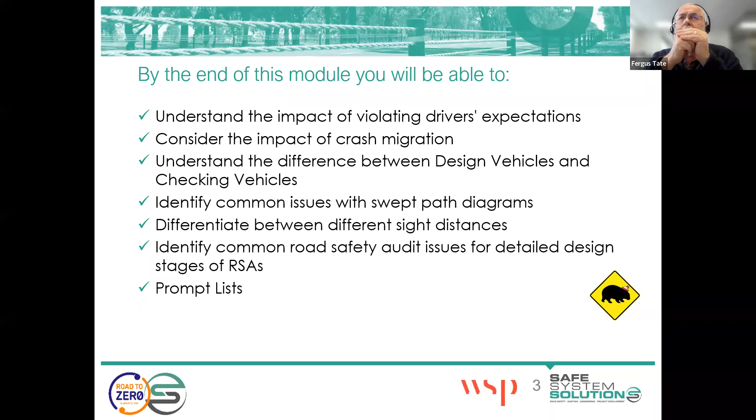Okay, thanks Kenn. As Kenn said, at the end of this module I've tried to collect things that I think are important as we go through, things like what happens if you violate drivers' expectations, how crash migration can occur, and those are particularly pertinent to rural road issues. Then looking at things like design vehicles and check vehicles, which apply to both urban and rural, and looking at some of the things that occur around sight distances in the urban area. Finally, I want to finish off looking at the information for safety audit at the detailed design stage and the role of the prompt lists. I think the really important thing with any safety audit is actually understanding the scope of the project you're involved in, and making sure you and the audit team members have actually got the skills to cover that scope as you go through.

So it's quite important, so I want to kick off first of all looking here. The Guide to Road Safety Part 6 talks about safety audits and identifies four stages of safety audit, I suppose: the feasibility, the preliminary, the detailed design, and the pre-opening.

And I've got a little poll here, which if I can find it and bring it up... I'll bring it up on screen and you'll be able to see it right away there, Ferg. Thanks, Kenn. So what do you think is the easiest stage to audit? You've got a single choice, and if you pop that in your Menti, that would be really good.

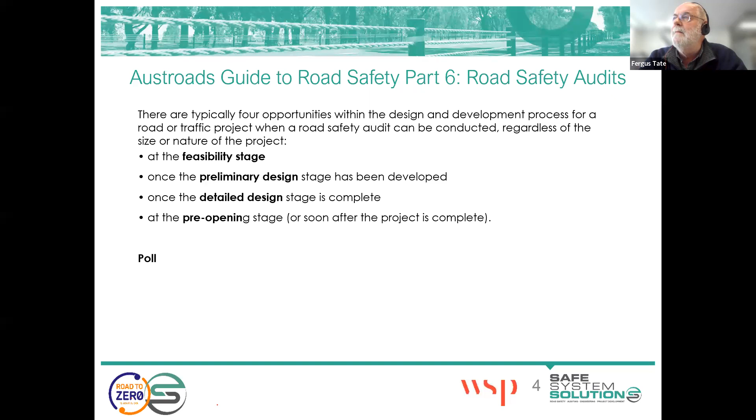Okay, so we're seeing some people popping their thoughts in. We'll give it a second here, and lots of answers are coming in.

Give it 5 more seconds. 4, 3, 2, 1. Remember, you're not marked on these.

I'm going to stop, and we'll share results with everybody. So looks like for most people are saying pre-opening, closely followed by preliminary design, and only a few people are saying detailed or feasibility stage.

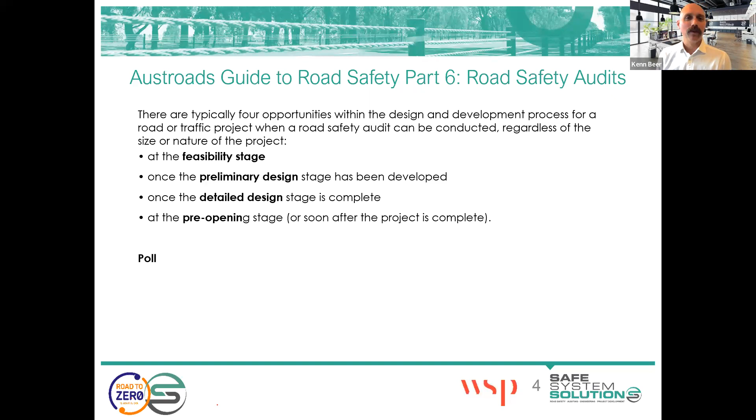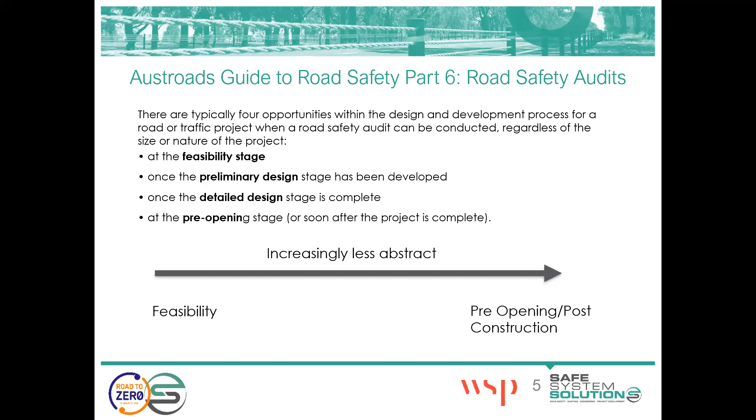Over to you for your thoughts. Yeah, well, I agree. I think when you're looking at the pre-opening or the post-construction, it's very concrete. You're looking more or less sometimes at a snags list and things. It's far more difficult to do the feasibility stage and the optioneering, and that's actually an area where using things like the Safe System Assessment Framework and option selection plays a much bigger part when you're back in those early stages. I actually disagree slightly with the poll, because I think it gets increasingly easier as you move towards post-construction.

So I think the detailed design is actually easier than the preliminary design, because with detailed design you've got something that's far more concrete in front of you that you can work your way through systematically.

One of the things that I find when I'm doing the audits, particularly in design and post-construction, is getting the evidence for the audits. And I like to be able to tell the story of why something is. Just because I don't like the way somebody's done a design doesn't necessarily mean it's bad. You have to be able to tell the story.

You have to say, I don't like this because it's going to have this impact, which will result in more deaths and serious injury. And if that story becomes more and more convoluted in order to get to death and serious injury, you know, like it has to be a Wednesday at 3 o'clock on a snowing afternoon, and if this happened and that happened and something else happened, then you might end up with death and serious injury.

If the story becomes long and convoluted to get to that point, you've really got to ask yourself, was it real? I think particularly as you move across, when you're in those earlier feasibility stages, you've got a lot of imagining to do, and you've really got to ask yourself if it's real.

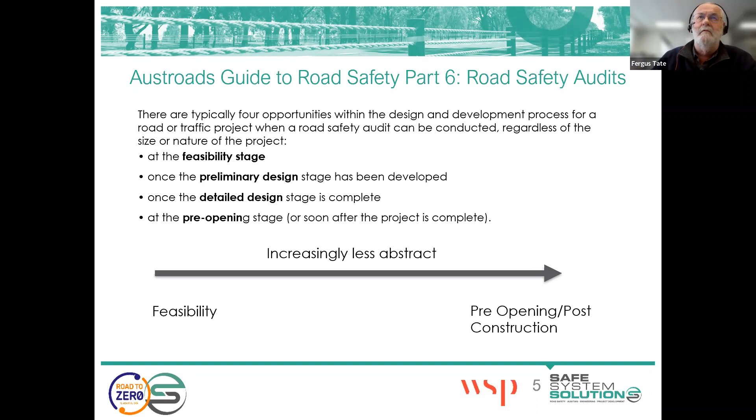I want to start off now talking about drivers, and I don't like necessarily reading off slides, but these are 3 quotes from a US Highway Agency document from 1997. Drivers generally make fewer errors at geometric features that conform with their expectations than at features that violate their a priori or ad hoc expectancies.

In other words, drivers make fewer errors when things conform to their expectations than when they don't. If they're thinking something's going to happen, and that happens, that's fine. If they think something's going to happen and it doesn't, there's more chance of it ending in an error. If a road design is consistent, then the road should not violate the expectations of motorists or inhibit the ability of motorists to control their vehicles safely.

Again, consistent design feeds into that idea of making fewer errors. Consistent roadway design should ensure that drivers are able to operate safely at their desired speed along an entire alignment. So the key thing here is, does the design you're looking at feel consistent and send the right messages?

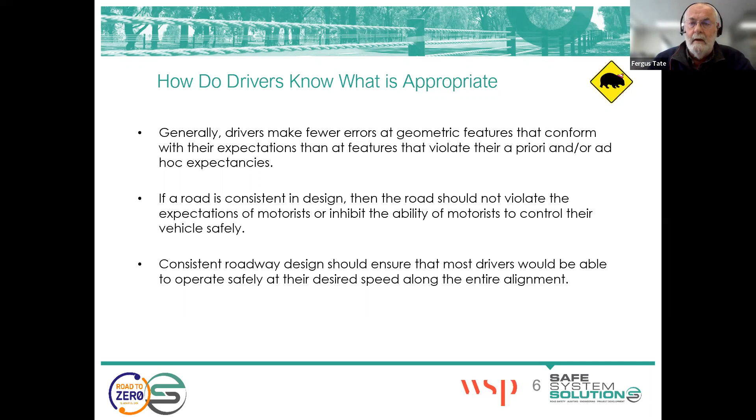There are a number of features that don't follow these principles, and in particular, one of them is curves. I don't know what it's like in Australia, but in New Zealand, the bulk of our crashes occur on curves on rural roads. Intersections and curves are the two biggies. There are two types of curve that violate drivers' expectations and increase the likelihood of making mistakes: those that are difficult to read and those that are out of context.

Now, the curve negotiation equation says that E, which is the super elevation, plus F, which is the friction, resist the forces from speed and radius.

And I've got a little poll. Kenn, can you bring up the poll, please? Launching the next one. Okay, so of these four factors, which has the most influence on curve negotiation?

Remind us what E is. So E is the super elevation or camber of the curve. F is the friction of the pavement and the tire. V is the negotiating speed, and R is the radius of the curve.

People are pondering that and popping in their thoughts and ideas. We'll give it another 5 seconds on this one.

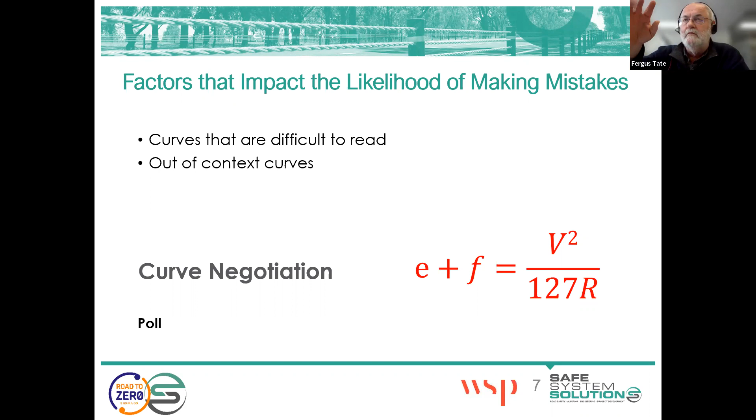Yes, when we're looking at a curve, drivers can't see F. They have no idea what F is. They can feel E once they're in the curve, but their curve negotiation speed V, which is critical to them coming off the road, is more set by R, the radius. So V and R are the two greatest components that you have.

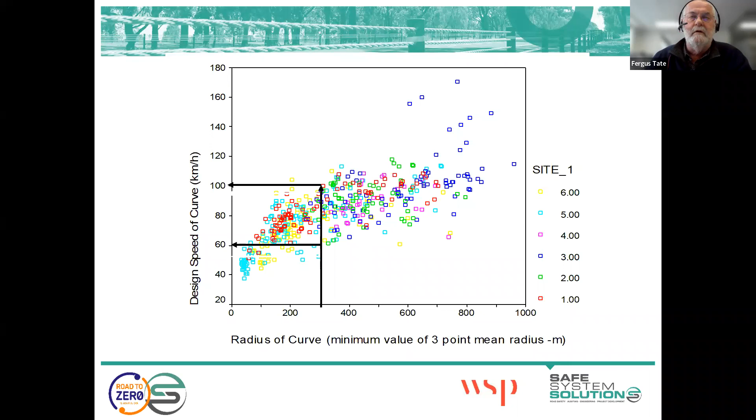Now there's a group of curves that typically sit between 250 meters, sometimes 200 meters depending on who you're talking to, and 500 or 450 meters, where effectively drivers are not changing their speed from the approach for those curves. But as I showed you, that 300 meter curve could have a 60 kilometer an hour design speed, and yet they don't change their speed of approach.

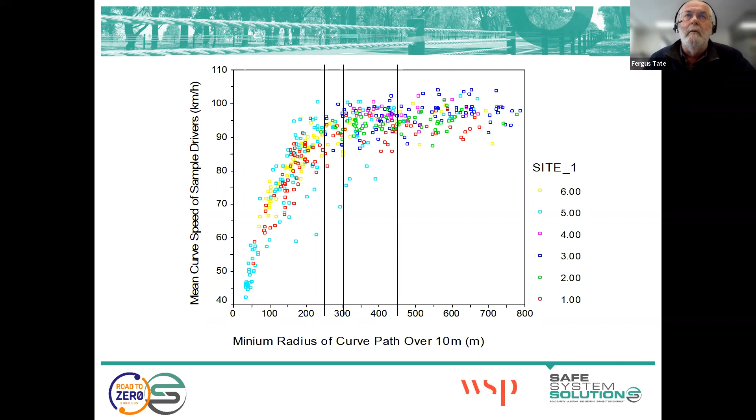In fact, the New South Wales guide actually talks specifically about these curves as being hard to read. It's difficult for drivers to assess what the design speed is and to behave appropriately, because the curve could violate their expectation, particularly if they've driven through a lot of 300 meter radius curves with a higher design speed, and then get another one that looks the same but has a lower design speed. So it's quite important that we try to avoid those sorts of curves.

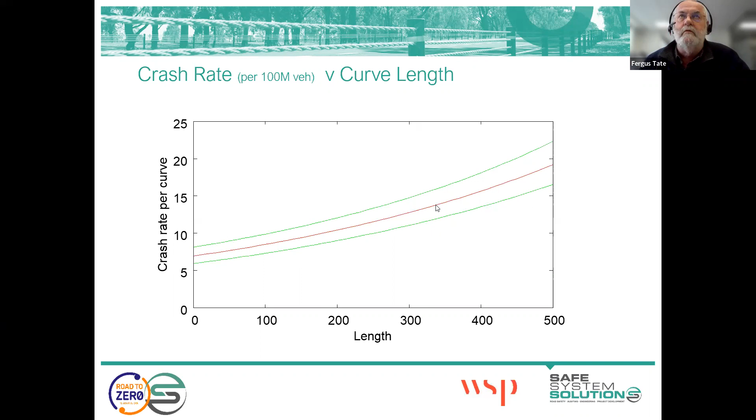The other thing we find is that the crash rate per 100 million vehicles entering the curve increases quite substantially with the length of the curve. So if you've got one of those curves and it's a long curve and you go into it too fast, the chances of you getting out the other end in one piece are greatly reduced. When you've got short curves, you can more flat-line them and it's not so bad. But if it's a long curve and you make an error of judgment entering it, the chances of coming out the other end safely are quite reduced, which is why this graph rises so dramatically.

The other thing with curves is coordination. Here's a bunch of poorly coordinated curves. So this one here, we've got a hump, and then just beyond the hump, we've got a horizontal curve.

So it makes it very difficult to see things, so you don't know what's going on. In this case here, we've got a rail crossing just beyond the profile that makes it difficult to see. You know, how you actually coordinate curves is really important. You really want to avoid two similar horizontal curves in the same direction, as this gives you a broken back effect, and you need to separate such curves out by probably around 2 seconds of travel time. And you need to be wary when you're doing designs about optimizing the vertical profile.

My friend Keith Wheel some time ago showed me a design he was auditing, which I thought was fascinating. In a distance of about 800 meters, the designer had put in 6 different vertical elements, 6 different vertical curves, and while that might have balanced the cut and fill, it makes it a really difficult alignment to read. In some ways, it's a little bit like polishing a turd. You're not actually winning a great deal out the other side, because those incremental bits compared to a single curve are really quite small, and certainly smaller than the bulking factor of your earthworks.

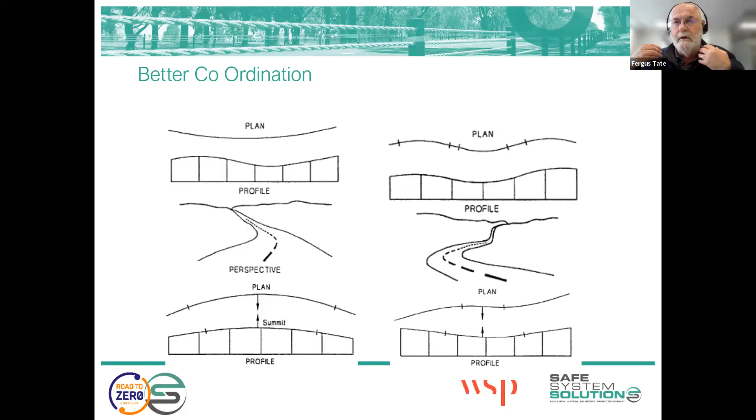You're better to coordinate curves in this way so that you get a flowing alignment that people can see their way through and go. So the big thing so far is watch out for curves in that 200 meter radius, that 200 to 500 meter radius band. And then if you're in that curve space, make sure people can actually get the forward view to see what the forward alignment looks like.

One of the things that comes up time and time again when we look at this business of approach speed and curve speed is crash migration. Too often we work on projects, whether they're realignments, passing lanes, any sort of shape correction and link width increases that increase the operating speed. They typically keep being built until they become too expensive to build any further. So what usually makes them too expensive is something like a bluff or a deep fill. And often what you find is that the scheme finishes just before a really dodgy curve or a really dodgy narrow section.

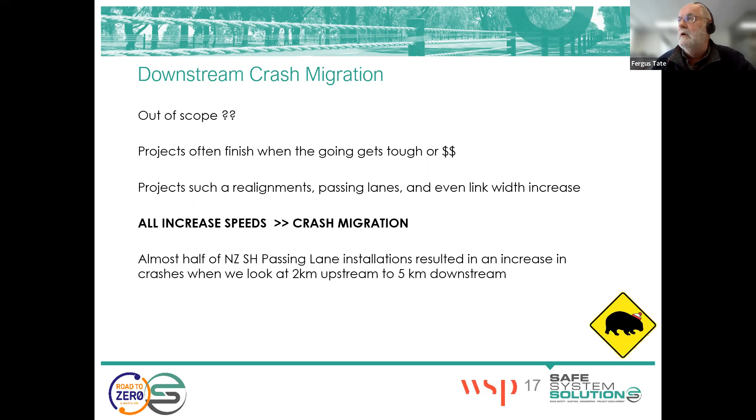Fergus, you've got a couple of questions that have come on screen.

A couple of questions have come in. I'll come back to crash migration, but the first one was just around how the speeds were calculated for the curve speeds you were talking about. Were they actual vehicle speeds measured, or were those sort of ball bank tests or the like?

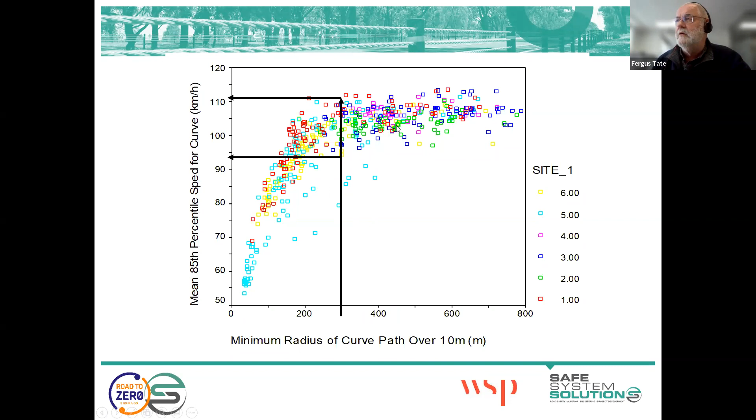In these graphs here, the minimum curve radius was calculated using the curve equation, so that's the minimum negotiation curve speed. The approach speed in this case was actually measured in a sample of drivers driving those curves in an instrumented vehicle. The other one we have done is looked at the relationship between the approach geometry, which is the geometry typically over the preceding 500 meters.

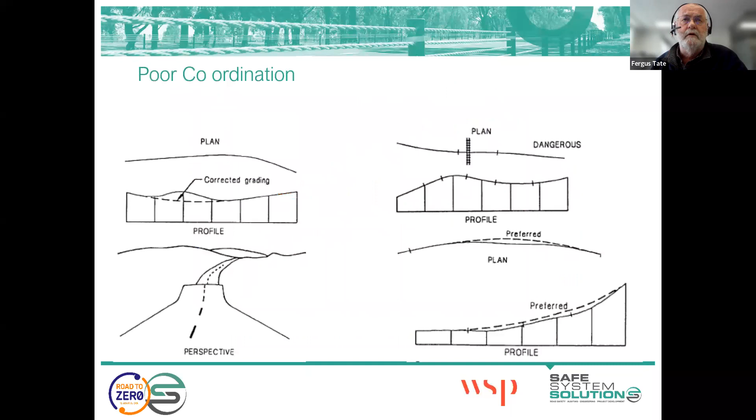That was actually used in the out-of-context curves analysis, where we calculated the approach speed based on the horizontal geometry of the preceding 500 meters, and the curve crash rate based on the geometry of the tightest 10 meters of the curve. Right, okay, good, thank you.

Next question is around, where do you stop? So this is back to what you were talking about for the crash migration. Is it anything that influences, or anything you see on the way out to the audit site? How do you draw that line of what would be included in your audit and what wouldn't?

What I would be looking at, particularly if it was a realignment, is the first couple of curves downstream of the project. What you're really looking for is the situation where speeds are likely to have increased. Coming off the end of the project, if it's been a realignment or something like that, you will get an increase in speed.

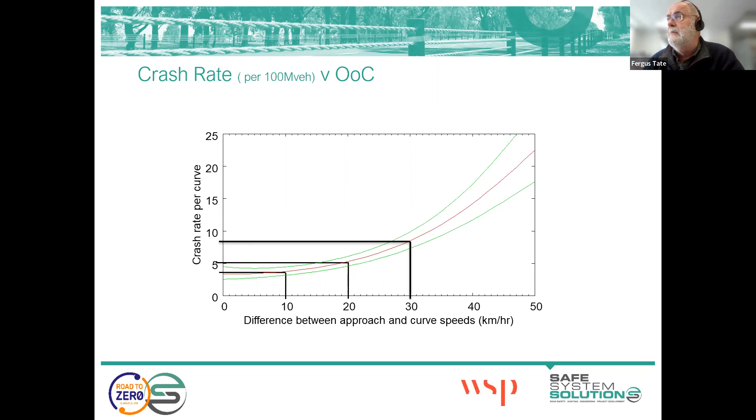If you're joining another new alignment, that increase of speed will be trivial because it already has a high speed on the new alignment. If it's going back to an old alignment, then you'll get that speed differential, and you'd certainly look at the first curve and possibly the second. After that, basically, if they've got through those two, they're probably back to normal. Does that make sense? Yeah.

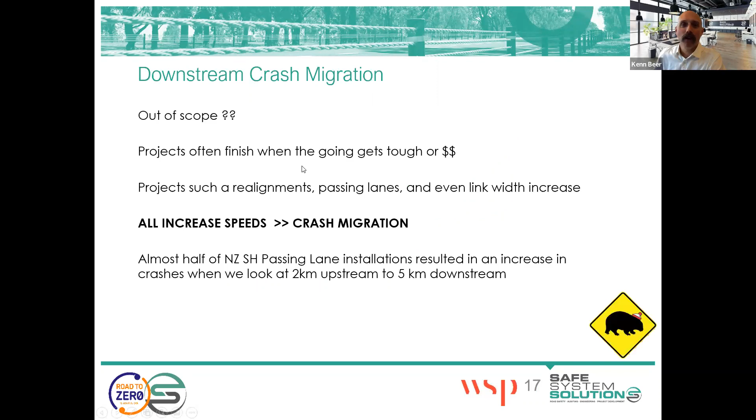I'm just going to talk more generally about safety audits as a whole, particularly at the design stage. There's a lot of stuff - a lot of people talk about the crash history and that you should have the crash history. You've got to remember that a safety audit is not a crash reduction study, and neither is it a comparison with standards.

You're asking yourself, what is it about this site that can be improved to improve safety? So it could be compliant in terms of standards, it may have no crash history, but you're asking yourself what things can be improved.

But there's a lot of data that you can have, like the crash history at the site, which may indicate the types of problems that need to be solved, and previous audit reports, and the volumes of pedestrians and cyclists and the types of people using it. But they're all about trying to understand what's happening at the site, and what the safety problems might be.

Not, you know, the standards say this should be this radius curve, and in fact you're 2 meters shorter. I was doing some work in the UK a few years ago now, and one of the things that really frustrated me there was...

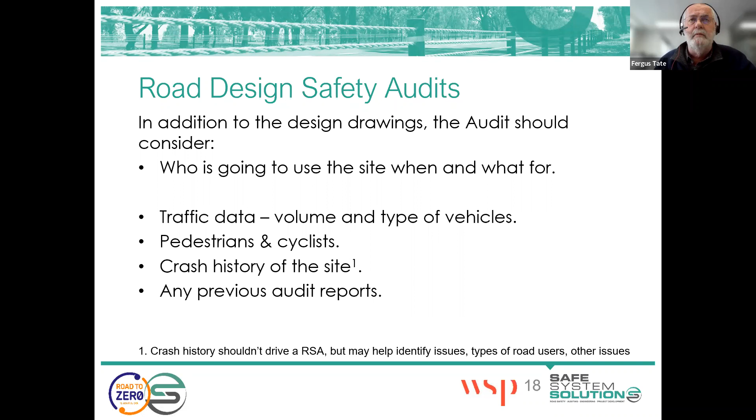So in addition to the drawings, you need to compile all of that range of data to help you understand the site and what sort of problems you may have there that need to be addressed. Now, who can tell me the difference between a design vehicle and a check vehicle?

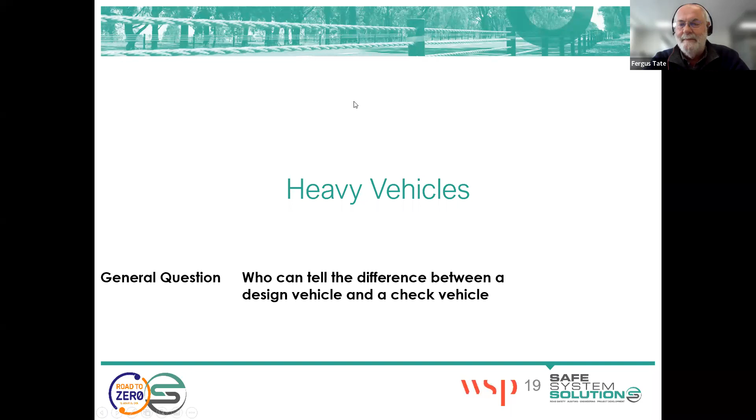I've got some answers for your design vehicle checking vehicle question here. We've got a few different answers, and you can pick one that you like, Ferg, and we'll give a prize. So we've got one that says design vehicle is the one using the site, check vehicle is a check versus RTS 18. One just talks about clearance envelopes. And the third one to choose from: design vehicle is what uses the site every day, check vehicle is maximum size vehicle that may enter the site.

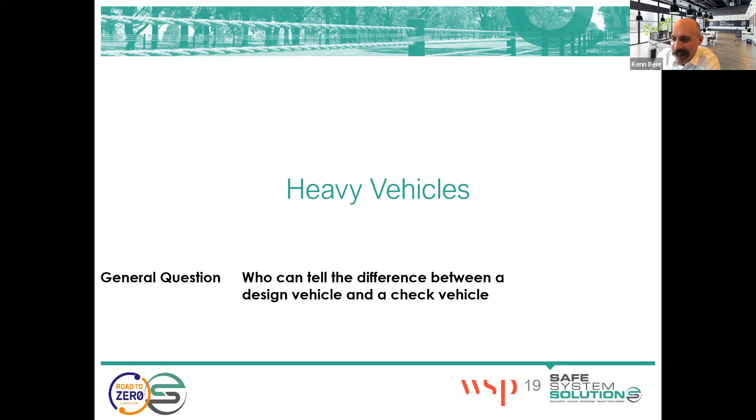Typically the way I look at it is that under the road rules, the vehicle should stay in their lane. So the design vehicle is the most practical vehicle that should not encroach in the adjacent lane or shoulder. However, the check vehicle is there to assess what would happen if an occasional predictable large vehicle were to use the site - so it doesn't have to stay in its lane. It might be something that goes through it off peak, or another time of the day.

In New Zealand, we typically use for the state highways a quad axle semi as the default design vehicle, and then we might check with a 20 meter B-train or 25 meter B-train, depending on what was using that site by exception. So that's typically what we're doing. What we're thinking is that you're unlikely to have those extra large vehicles often - in many cases they actually turn within the same parameters as the quad, but you're looking at them being used on occasion when other people can get out of the way.

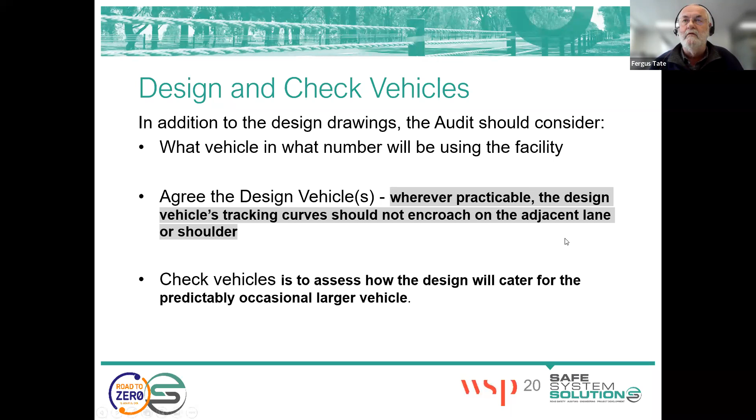Issues with design vehicles, particularly when designing urban intersections, include using the wrong design vehicle, and making sure that the swept paths are actually accommodated. One of the key things with the swept path is the right speed assumption.

If you ever get turning circles on a drawing, find out what speed they were done at. I was just looking at a project where a vehicle was going to pull in and do a turn, and I found that the swept path that lets it make the turn without moving out of the lane assumes 5 kilometers per hour. So the vehicle was going to turn across 2 lanes of traffic, which in itself is a disastrous design. It's going to filter turn across 2 lanes of traffic and clear those, doing it at walking speed, because that's 5 kilometers per hour.

Interestingly, when we bump that up to 20 and 30 kilometers an hour, guess what? It couldn't stay in its lane. That becomes particularly important where you've got reverse lock turns, and the turning circles have been done at low speed. It's really hard to go from lock to lock at higher speeds without drifting.

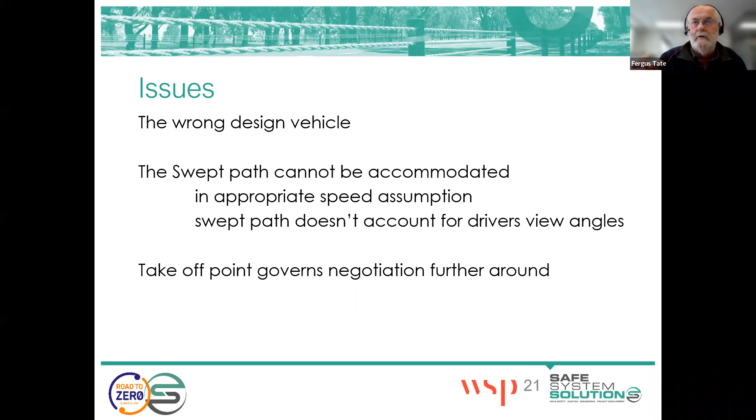The other thing that becomes really important is what I call the takeoff point, particularly where the takeoff point governs the curve negotiation further round the curve. Maybe on the exit of the curve, you've got to set yourself up perfectly at the start so you can get out at the exit, and yet you haven't seen the exit. So we need to have a look at that.

The sorts of things we've got to watch out for are encroachment into the adjacent lanes, encroachment into pedestrian areas - and that's really interesting with buses. Frank Lai at Leeds University did a UK study on pedestrian impacts with buses. The biggest impact was wing mirrors on buses hitting pedestrians standing at the side of the road waiting to cross. Also conflicts within the intersection and impacts with roadside furniture.

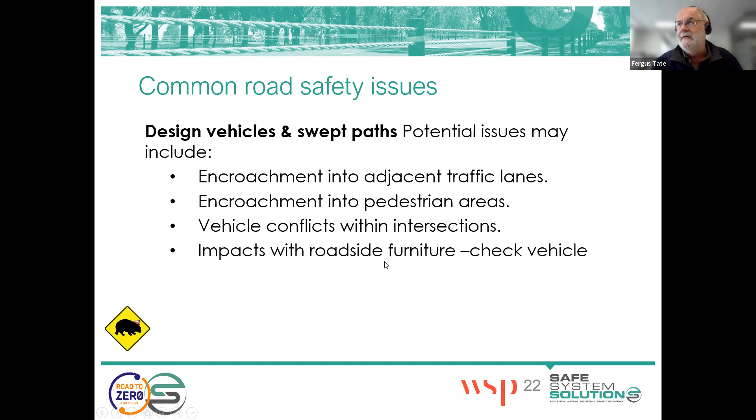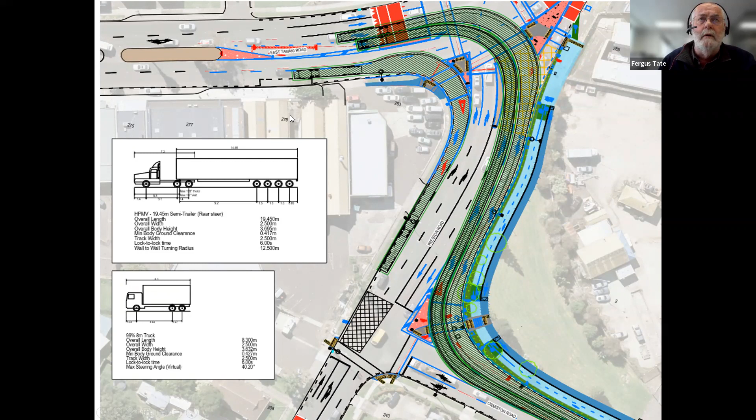In the Austroads guide, you're talking about 2 meters clearance between these vehicles and 1 meter between vehicles in the same direction. So if I roll back up here, nothing like that's happening in this case. Although I'm not design guide driven, it's certainly something to have a look at in terms of what's going on and what the potential conflicts are, and whether they could end up in sideswipe crashes as a result.

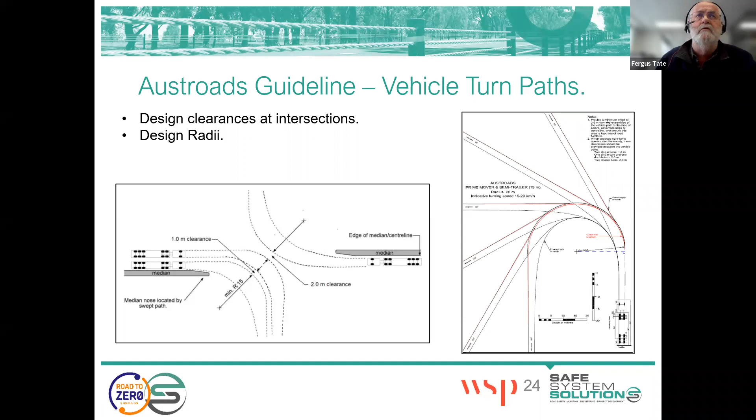This one here is an interesting one. Every time I see a swept path that does something like this, it rings alarm bells, because it's very hard - I used to drive a bus, so I've just recently sacrificed my license because I've got diabetes now. In order for this vehicle to end up over there, it's got to do a very complicated series of maneuvers, which are going to make it very, very difficult. Because if I was driving that, I'd drive it as a single curve, and I would end up encroaching here.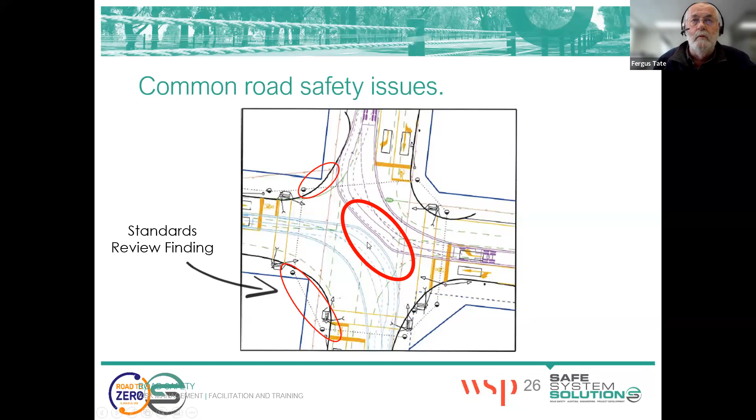So somebody has worked out a convoluted tracking path through here in order to get that clearance between the two opposing turns, and that's really a made-up solution, if you like. It's not one that drivers would follow.

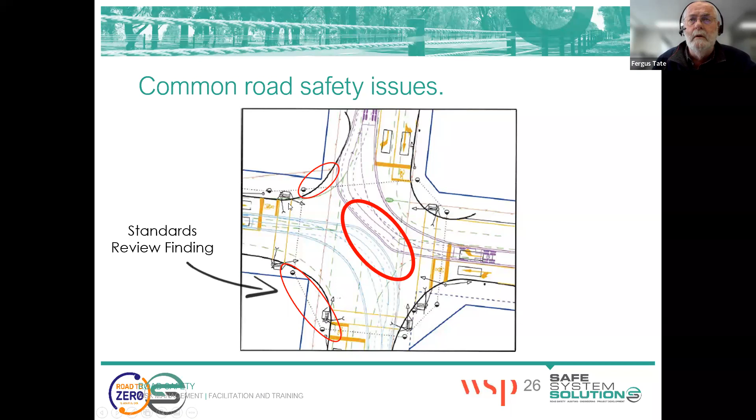Also, looking at the swept path around here, we've got issues where we have pedestrians waiting at the signals, and they're vulnerable to things like coaches and mirrors as we go through. Over this side, the curbing is probably going to cop it as well.

So here's another one. This is the bus depot, isn't it? Yes, that's exactly right. It's a new bus depot being designed, with the car park bit there, and it's where all the buses are going to be going in and out. As you can see there, there's some swept path challenges mounting over the areas.

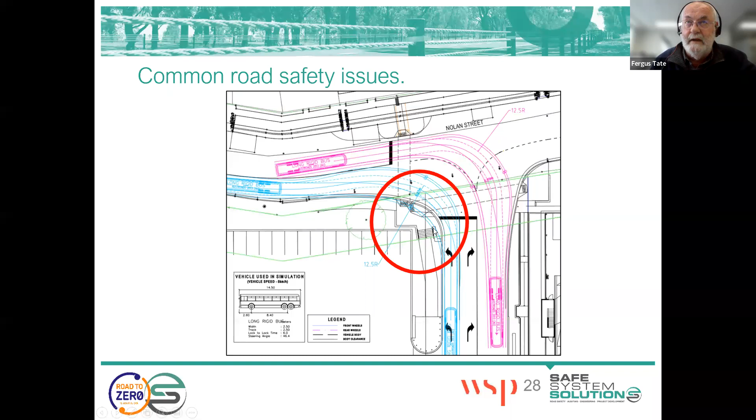It's bloody near on the wall to the steps. Yep, that's right. That kind of stuff is a good highlight of probably incorrect vehicle choice, where they may have said, well, a checking vehicle potentially is a bus. Well, that obviously is not going to be right to call a bus a checking vehicle in a bus depot. It would be a design vehicle.

So imagine that you're a visually impaired person standing here waiting on these tactiles, because that's where you're waiting to do. Then somebody comes and whacks you on the head with their wing mirror as they make this ridiculous turn. This is the type of thing in urban areas that we've got to watch out for.

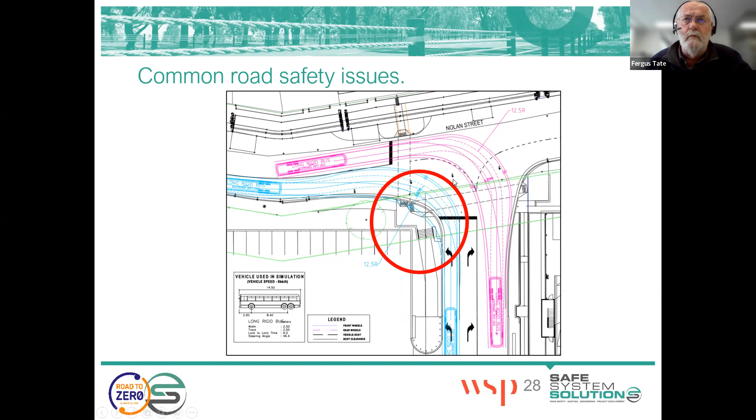Here's another one with parallel movements through here. These movements can run at the same time, and sure enough, you've basically got an overlap through this area here.

Unlike the first example where I showed you a single unit and a truck and trailer unit, where it's more than likely that if they were traveling in the same direction they would stagger themselves and sort themselves out, these guys are coming from opposing directions. They've not got that option. So you've got a highly increased risk of sideswipe crashes.

Again, with all the things in safety audit, the question is what is the crash outcome that's likely to happen? These have got insufficient separation of the turning paths, and that's likely to lead to an increase in sideswipe crashes. Always reason it back to crash type.

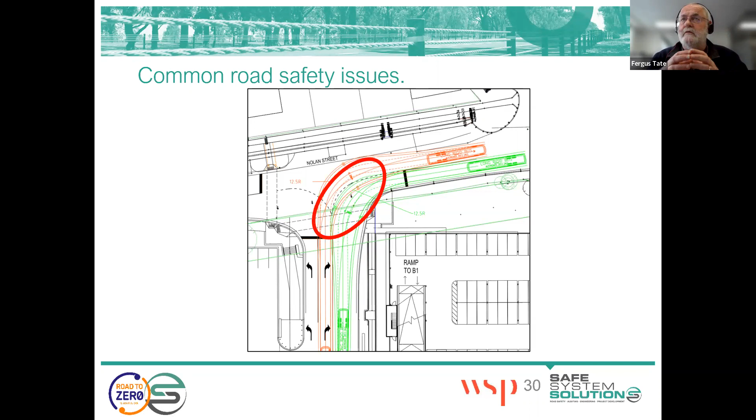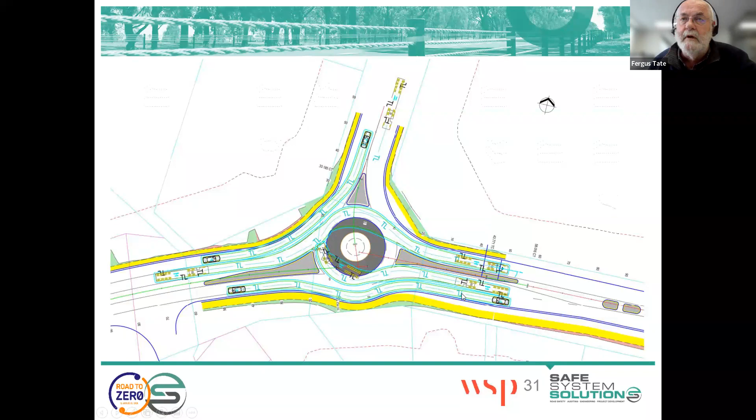This is another interesting one where the swept path of the bus—this is a turnaround facility on State Highway 2. This is a swept path for a truck, comes in here, round, and waits at the give way. Now, the vehicle that's likely to hit him as he pulls out is over here.

If you're sitting in the cab of a vehicle, you've almost certainly got to strain to see, or you may not even be able to see that vehicle because the stand-up point isn't compatible. It would be really nice to square that up so they could look out their side mirror and see what was coming, but the minute you do that, you can't actually turn this side of the wire rope barrier. So there are some issues floating around in here.

So this guy, thinking about the safety issue, when parked here, cannot adequately see the approaching traffic, and may choose a wrong gap, which would end up in a crash. So that's what's going on there.

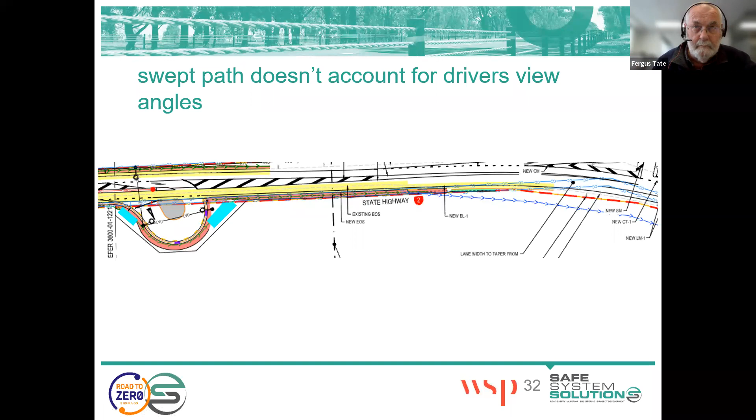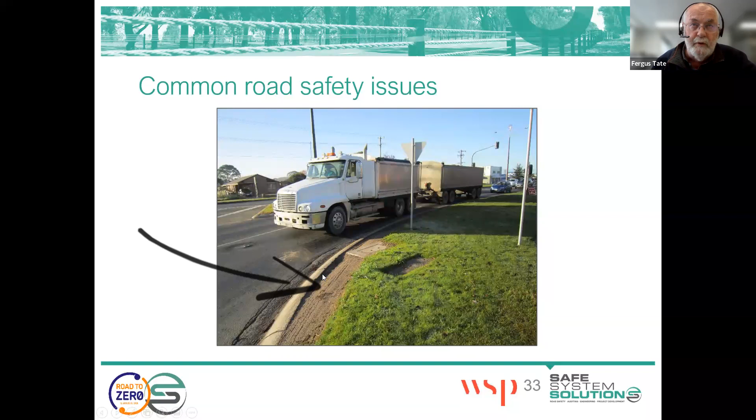There's lots of signs that you can see on site that tell you a design isn't working. You can see the start of these when you've got things like post-construction audits and broken curb and dirt everywhere. This one here, the tracking is quite clear that in order to make the turn that's required, these guys have had to come right over onto the island.

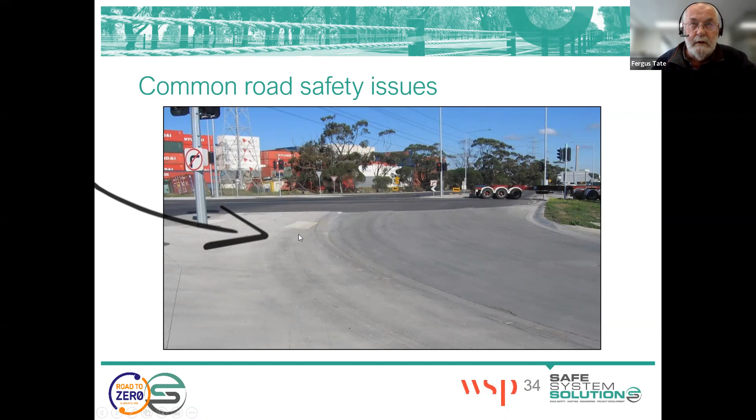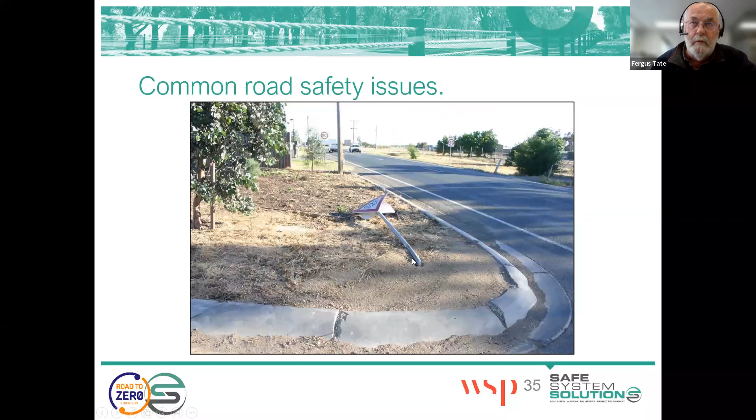So these are all signs in the classic infrastructure. And the signs getting bowled and things, not only that, somebody's now got to come back and put themselves at risk to set that sign up, and it'll probably get knocked down again.

The other one that I want to talk briefly about, which is quite important particularly in urban areas, is sight lines. It's another area where it comes up regularly in safety audits - we don't have adequate sight lines to other road users, to other vehicles, and in particular in rural areas to the pavement, because the pavement is where the markings are, which tell you what it is that you need to do, whether they're lane markings or hold lines or anything like that.

When you're dealing with intersections in particular, you want the sight lines to a zero object height so that you can see the pavement markings and know where you're supposed to stop, so you don't overshoot and put yourself at risk of collision with through vehicles.

There's a number of things that will restrict sight lines, and particularly when you're out on site, you need to be aware of some of the more dynamic things, such as shadowing vehicles, but also parked vehicles.

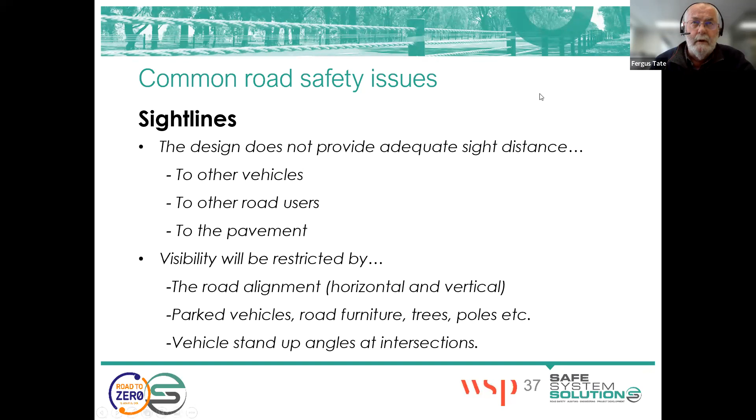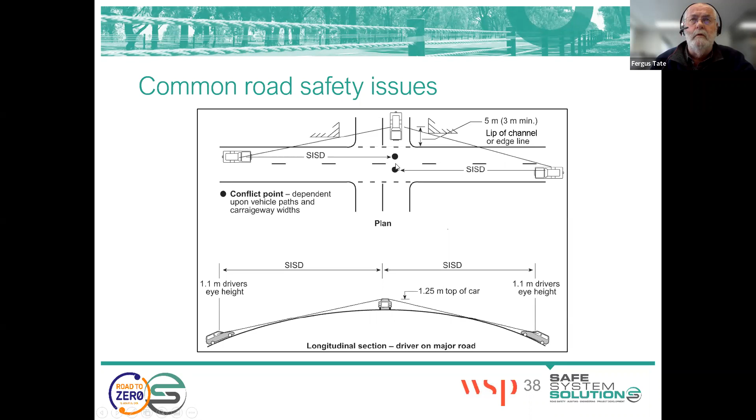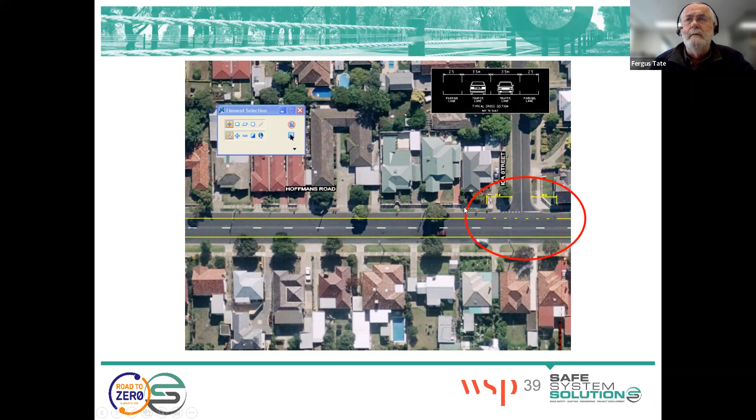But if you imagine a road like this - I'm just looking at this one here, we've got an intersection here. We can go back 5 meters and see how far, but we've got trees and obstructions through here. When we actually have a look at this now, if you look just behind that Toyota before the Pajero, I think you can just see the roof of...

You could just see the white bit of this bit here, I think - is that it just there? That's giving you no time to clear the intersection. So you've got a sight distance problem there.

The other one that you get, of course, is where you've got multi-lanes of traffic and you've got one vehicle shadowing the other, and you have problems. That often occurs with left turn slip lanes and through vehicles - you think the vehicle's turning left and you pull out, and the vehicle that's following just beside it cleans you up.

There are heaps and heaps of different sight distances, and you need to work your way through all of them, but also have a think about what it is - MGSD is quite a big requirement. It's the minimum sight distance based on the gap necessary. So what you can do in some situations is make sure that you provide as a minimum safe stopping sight distance.

Interestingly, providing safe stopping sight distance above all else is effectively changing the priority at that intersection. Because what you're saying is, instead of the side road having to give way, if the vehicle moves into the traffic, then the through traffic must stop.

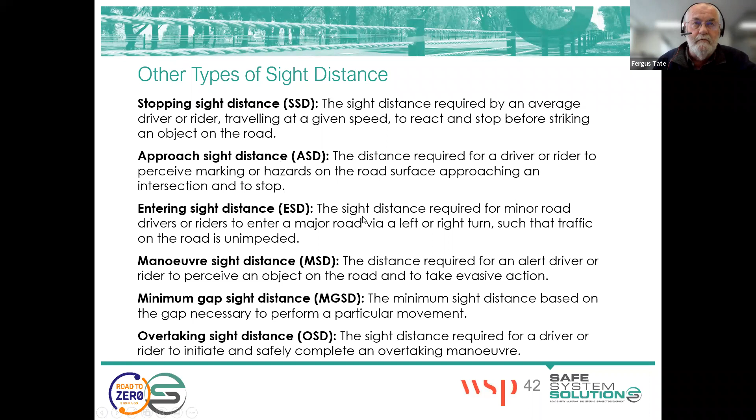Some of the common issues - how are we going for time, Ken? Doing well, Ferg, you've got plenty of time. Probably about 10 minutes - we're going to give them a stretch break, unless you're... Well, I'm actually going to be nearly finished, because I seem to have gone through it much faster this time. I don't quite know why. No, it's not a problem - they will. I've got a nice juicy assignment for them to sink their teeth into, so they'll use any spare time at the end to start that process. Okay then, so we'll let you finish off, and then we'll have a little stretch break after you're done.

Okay, yeah, I'm sorry. I seem to have gone quite a lot faster this time, by almost twice the speed.

Okay, common issues at intersections. See-through is where you're not looking at the current intersection—you can look straight through it and not realize the intersection exists, because you've got a line of sight through. That's quite common on grid networks particularly, and applies equally to rural and urban areas. The stand-up angle is the angle at which a vehicle is stopped and where it's looking, and can it actually see?

Sight lines to signals and roadside hazards. An interesting one is back of queue issues—this is a classic often to do with motorway ramps, which typically end in some form of traffic control. By the time you get a queue, and then the deceleration needed to join it, vehicles on the main line of the motorway have to decelerate to join that queue, and they may not feel comfortable doing so. It certainly won't be good for them to drop to 40 kilometers an hour on the main line to join the back of the queue. So you need to understand where the back of the queue is likely to be under different conditions, and add on the length needed to decelerate to be clear of traffic.

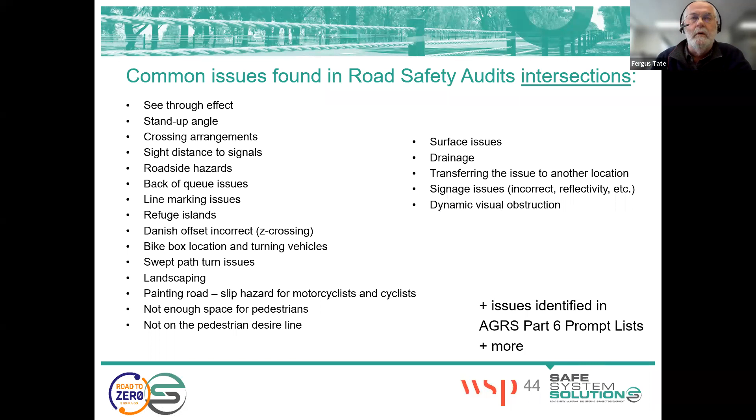Then there's dynamic visual obstruction—other vehicles typically blocking your sight distance. The Austroads Part 6 has prompt lists with considerably more detail, and I'll talk about prompt lists in a minute since that's the last thing in my presentation. I was just going to mention some of the mid-block issues, which I think are all reasonably self-explanatory. Skid resistance issues, of course, are very difficult to see.

Pavement defects are very easy to see, but typically they are not as big a safety issue as some people would like to think, though for certain users they are. One that I find particularly annoying is the flow of detritus from driveways and things onto the highway, particularly in rural areas where you've got farm fences.

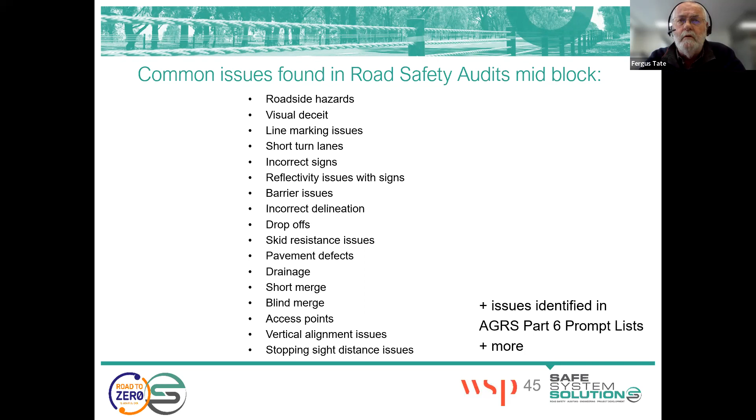We've done some work in New Zealand where we found that if you seal back 11 meters, you generally reduce the amount of detritus that ends up on the pavement, which is really important for motorcyclists, because there's nothing worse than coming halfway through a bend and finding there's a pile of detritus across the road.

Finally, in the prompt lists or checklists as they used to be called, the Austroads Guide has very comprehensive prompt lists, but they're hierarchical. When you first start safety auditing, it's worth having a look at all the individual questions and going into detail in the prompt list. After a few years you can probably just remember adjacent land use, public transport, pedestrians, and the questions you should be asking yourself. But do not ever be afraid to use the prompt lists.

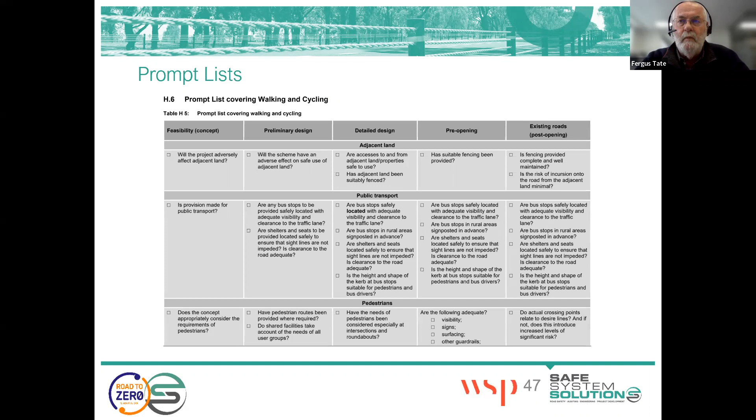One of the things I like to do, and used to do regularly with my prompt lists, was using them before I left site, because there's nothing worse than leaving the site, getting back to the office and starting to write up and thinking, oh shit, I never got anything on that. Then you're either faced with a 2-hour drive back out to the site, or writing some sort of waffly nebulous comment, or asking somebody to have a look at it on their way home from work.

If you sit down and use the prompt lists at the end before you leave the site, you'll pick up those things. The other thing I'd like to say is, in this day of technology, digital photographs and snips from the design drawings...

You pull the PDF up, you take a snip, or you take a digital photograph if it's post-construction, and you can save yourself paragraphs and paragraphs of writing. Instead of writing 'at chainage 475 on the left-hand side, 3 meters back, there is...', you can say 'see figure 2,' and it makes it so much easier. It's so much less likely to be misunderstood, and people can see your problem while you're there. So I think it's really important that you use the digital technology as much as you can.

It's even worse when you're using design drawings, trying to explain that on sheet 37 it's such and such, whereas you can take a snippet out and just go, this is what my problem is. You can annotate it if you want to for your sight distances. It makes it so much clearer for the reader and so much easier for you.

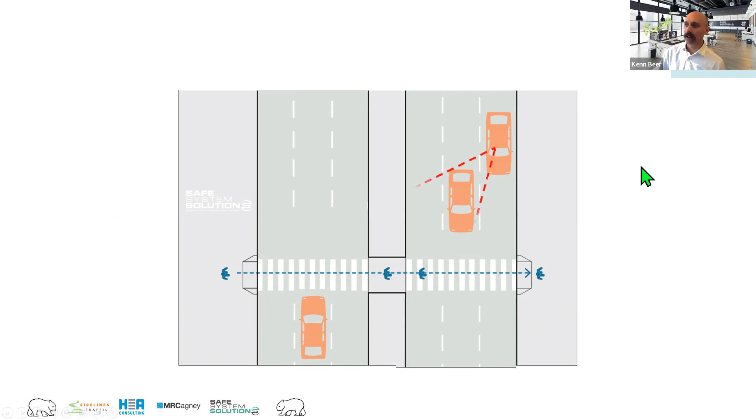I just thought I'd elaborate a little bit on what Ferg was talking about with dynamic visual obstruction on the approach to pedestrian crossings, because I'm working on some content for our raised crossing course. The idea here is that we've got a pedestrian crossing, and I've used a 3-lane crossing to illustrate it, but sight lines are blocked for that following vehicle across those areas. So that's why we don't do pedestrian crossings on multi-lane roads, as the general guidance.

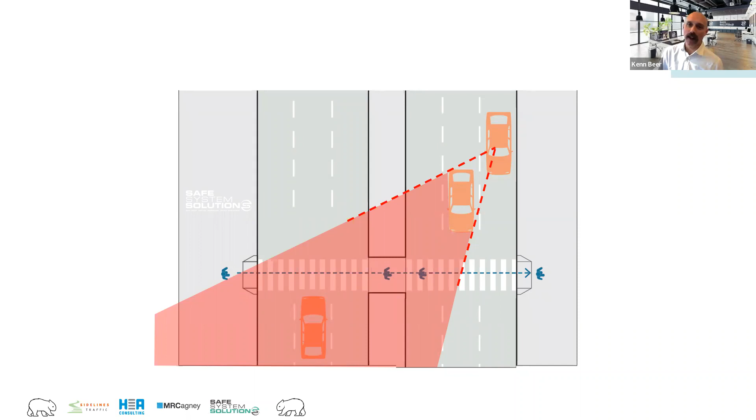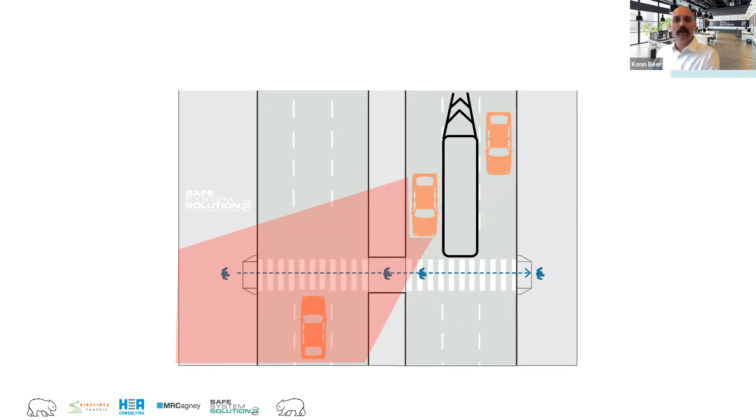But Ferg mentioned that raising the crossing significantly reduces the issues there. And the one he was mentioning was the idea of utilizing some road space for a refuge island, which can open up enough sight lines for the pedestrian to be seen. So that's just to fill in a bit of the gap there. We were just talking in words about it, so I thought I'd show a few pictures that might help people visualize that.

Okay, I'm just going to get my other slides up and running here, and we will continue.

Ferg mentioned prompt lists, and prompt lists are a really helpful thing as you start out auditing. The Austroads Guide, the 2022 version of the Austroads Guide to Road Safety Part 6, Road Safety Auditing, has these different prompt lists within it. As mentioned, they used to be called checklists, but we wanted to avoid people thinking that if they just followed through every question, they'd done the totality of the job. We really wanted to ensure people thought these are just to prompt your thinking, to start the thinking process, asking different questions. The Austroads one now has this front-loaded prompt list at the start, with generic questions.

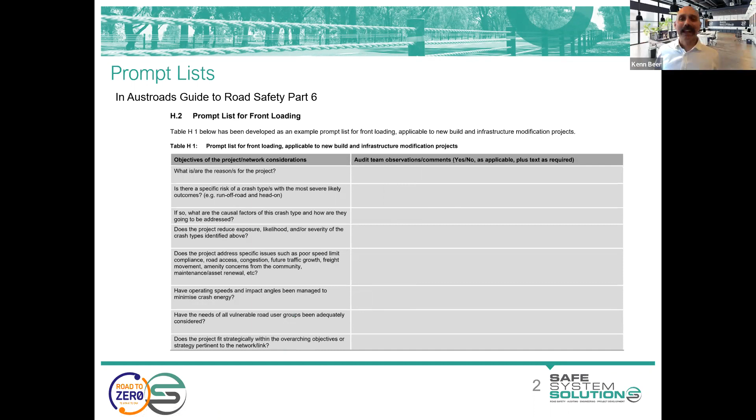You can jot down some thoughts and answers, but this is to help you set the context of your thinking as an auditor. You can see there different questions around operating speeds and impact angles, vulnerable road users, are they in the area, how does it fit in a network planning context, and a few other things. Really just to help you gather the context of the project.

The prompt lists H3, 4, 5, 6, and 7 then have these specific elements: local alignment, general aspects, intersection, walking and cycling, traffic signs, line markings and lighting. You'll use multiple ones of these, and each of the columns are the different stages of audit. So if you're doing a feasibility concept, which most of you will be doing for your practical audit component, you'd use that column, and then you've got these questions here. You can tick boxes if you want, but it's just to get you thinking about these different things.

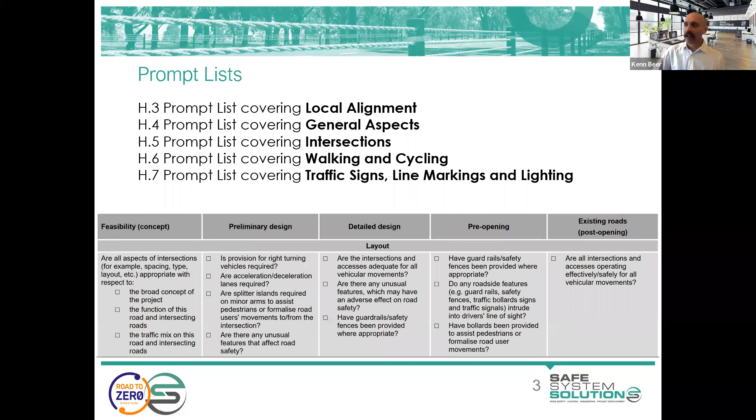In the New Zealand guidelines document, the 2013 document, pages 43 to 53 contain checklists. They're still called checklists there. In future versions, I think they'll be moving to prompt lists as well, but they also have questions. So you've got quite a good amount of material available.

But I do put here some reminders. Checklists are thought starters only—prompt list is a good name for them to remind you of that. Look at the project in its totality, stand back, look logically about it. You might find things completely not mentioned in any of these prompt lists or checklists that you are concerned with as a safety issue, and that's what we want put in there as well.

There'll be a lot of stuff in there that's not applicable—huge amounts of it, because we're trying to cover off all of these road scenarios and road upgrade things in these prompt lists. So you'll just be going, yeah, that's not applicable, not applicable. Okay, that one's interesting—we hadn't thought about how this would look when it's raining, or something like that.

You do not submit these checklists as part of a road safety audit. They're there for you in the background—a tool to help you do the work. You simply submit the audit report with the ones you believe are issues. So nobody sees all the things you thought about and considered and decided aren't issues. It's simply, what are the issues, and you present those in the audit.

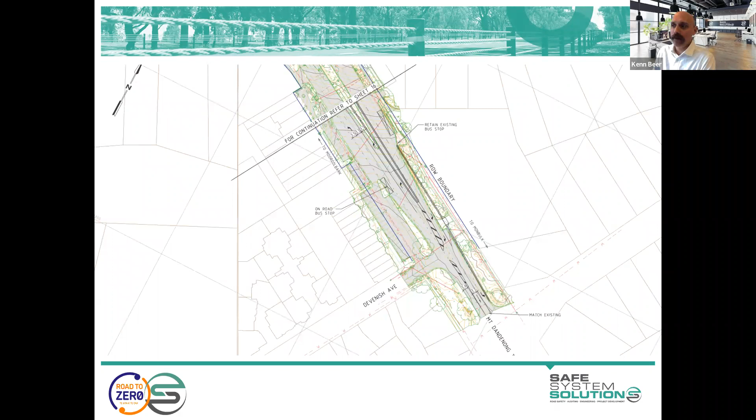There's a couple of extra sheets leading in to this intersection, so you've got that. So you'll be given these designs to have a look at. Real designs - we haven't fabricated these. We just simply took a design that was done by a large design consultancy and have run with it.

Okay, but we want to give you a little bit of vision, a little bit of site visit replication. It's not a real site visit, but it gives us a little bit of info. So what we've done is we've put a 360-degree camera at each of these locations and you're able to click on them and it'll drop you there and you're able to look around. Now, as I say, if you do it on your phone, you can just move your phone around and it's like you're there. And if you put your phone into one of those goggle things, you can look around, look up, look down and around like you're actually on the site.

If you can't do that, not to worry at all, you can simply just click on one. We'll jump into the roundabout, we'll have a look from 5. We'll jump into that. Here we go. And I'll have to mute this. Oh, there we go. So hopefully you're seeing that now.

There we go, we're in the roundabout. We can see it all operating, and then you can just drag around. You can look up in the air if you want and see what's going on. But you're able to see how it's operating, how it's functioning, where pedestrians are walking, and you're able to look around there. So you get a couple of minutes of footage of each of these.

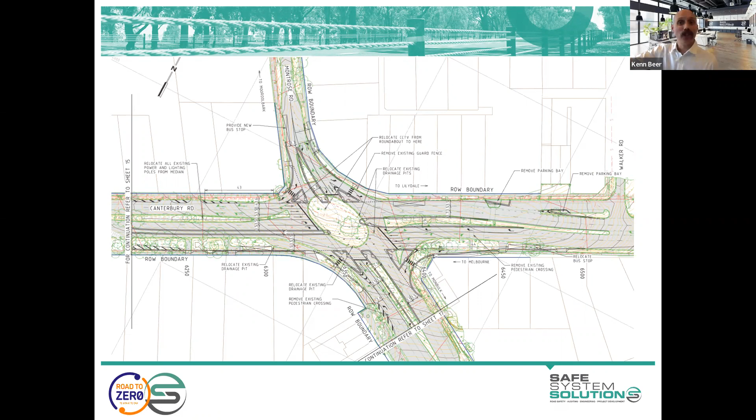But why do we then go out and look at the site? Well, we look at how things tie in, where pedestrians are crossing and going to, how vehicles are using the road, what type of vehicles are there, what the land use is, where vegetation is, where crossing desire lines are, what sort of angles exist now and are they going to change? Is there roadside furniture there at the moment, and how will that be in the future? Have they factored all of that in? So that's why we have a look at the existing site, even though we're auditing a design, a future scenario.

So we want you to do that. We've given you a bit of information here on things like traffic volumes, CV is commercial vehicle, so 7% commercial vehicles, 3%, 9%, 2%, and that's the road there. So you'll be able to jump in there. Maybe at 12 here, let's have a look at what we get at 12 there.

Okay, so we're seeing now a shopping area. Oh, looks like a little walk through there. We've got people all around there. It looks like, oh, buses. Okay, we're gonna have to think about how buses are gonna go through this new area. Looks like there's something over here as well. I wonder whether pedestrians might want to go this way. Okay, there looks like a signalized crossing here. Wonder if that's being factored into the future scenario.

So that's the kind of thinking we want you to be doing. You've got drainage grates, vehicles making that movement. Will they be able to do that in the future? Are there safety issues associated with that?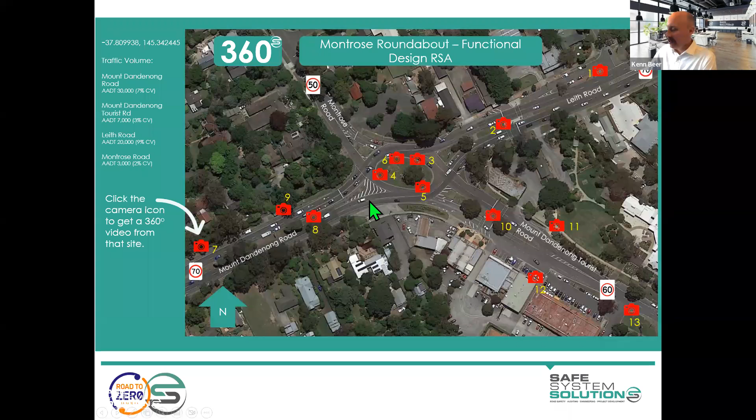Okay, so in the learning management system, and I'll take you in there shortly, you will get a one-pager with the instructions, telling you what the task is. Look at the designs, review the footage, find 2 road safety issues, only 2, and then write them up. We've put an example in there - you can see a snip of the design, circling the issue. It's from a completely different site, by the way. Then the explanation, following the formula, recommendation, categorization of that into supporting or primary, risk rating here, common, unlikely, moderate risk.

Now, that is the New Zealand Road Safety Audit template document, so you'll start to get familiar with using that. I'll take you through that shortly. You've got the risk matrix here. So if you think it's going to be common frequency that a crash happens and it's likely to result in death and serious injury, the risk is significant - that would be common, likely, significant. In this case, it was common, unlikely, moderate. That's common, unlikely, moderate is the risk.

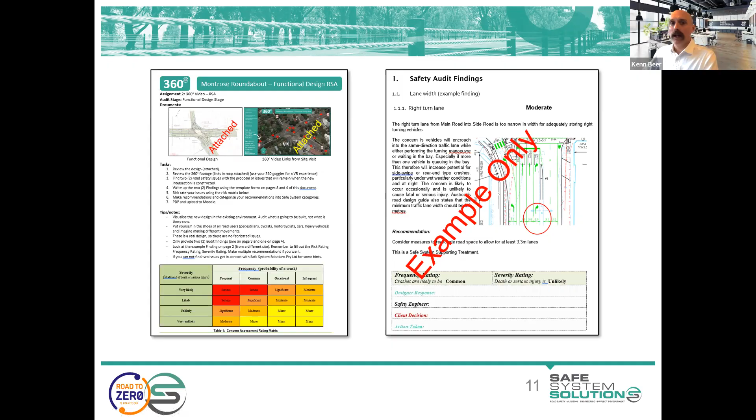Okay, so I'm going to jump into the learning management system now. I'll stop sharing, and it's probably a good opportunity if you have questions. I think a question has come in.

Okay, so is there a phasing diagram for the signals? No, so you're not going to get all the information you'd like. We're not going to give you a phasing diagram, so you can make assumptions. We're okay if you just make some assumptions, and then maybe in your findings say, we've assumed this, and that's an issue.

Yes, so there's a lot of things that you would check in a design like this, but we wanted to try and make it quick and easy, so you just need to find 2 issues only.

So I'm just going to now jump into the learning management system. There we go. Okay, so learning management system here, resources. You can go to reference documents here, and you've got the New Zealand procedure, and on page, I think it was 43 to 53, you can find checklists. And then you've got the Austroads Guide Part 6, and in there at the back in one of the appendixes is a good sort of 15 pages of prompt lists. So you'll be able to find those and use those.

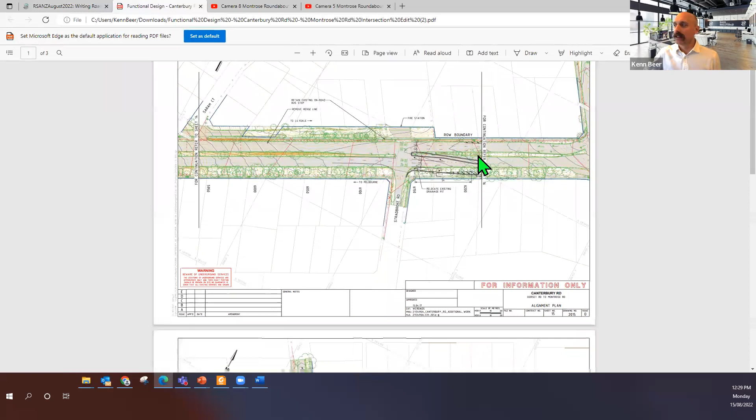Remember, that's what you're auditing. You're not auditing the existing conditions. You're auditing what is there, what is going to be there, I should say.

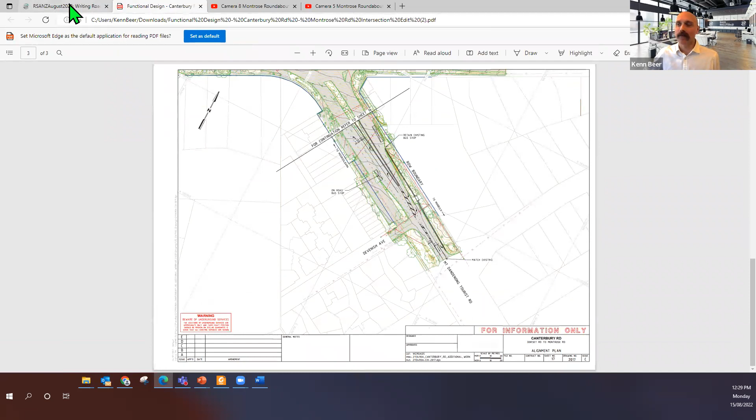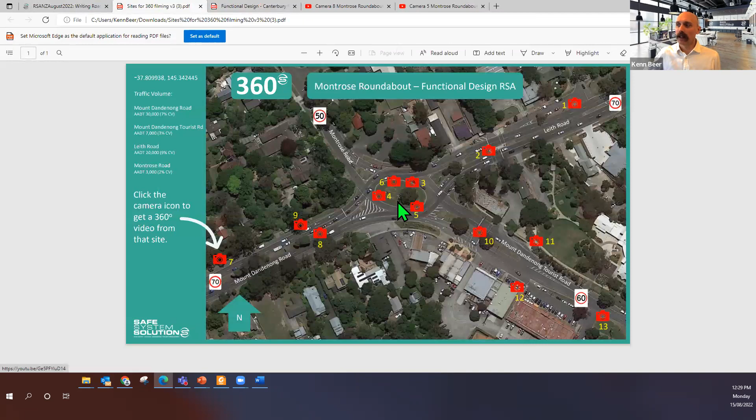So we've got that. We've got the 360-degree filming links to the cameras. So you get that document, and you can see they're all hyperlinked, so you can dive in and have a look. And you get the Word version of the actual assignment, because this is where you're going to write it in there.

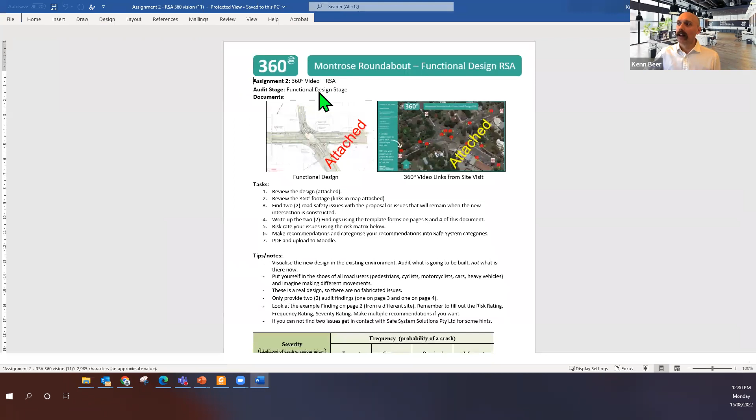Just open this up. Okay, so hopefully you can see that. There's the task. There's some tips here for you. And I suggest you read this. We have a lot of people just jump straight in and haven't read it.

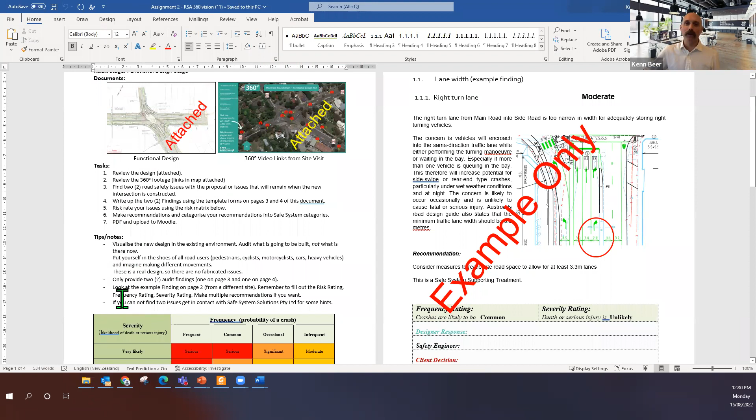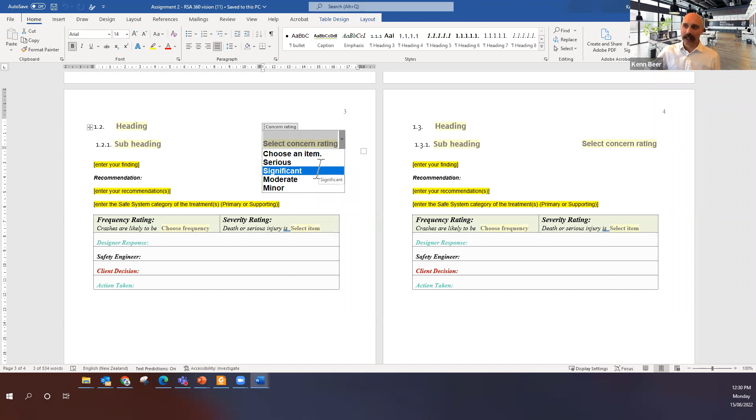We've got the example to help you out. And then you see there's only 2 pages there, because we only want 2 findings. Type a heading in, put a subheading in, risk rating. There it is. These are exactly how the New Zealand template is.

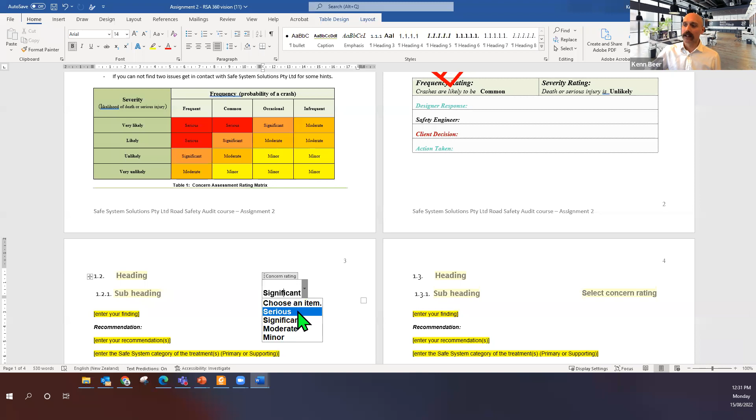Have a go at this, primary or supporting. That's going to probably be the biggest challenge for most of you, is trying to figure that out. Remember, the big impact changes are primary. Supporting are all the things that are good, but aren't going to give us that big step change.

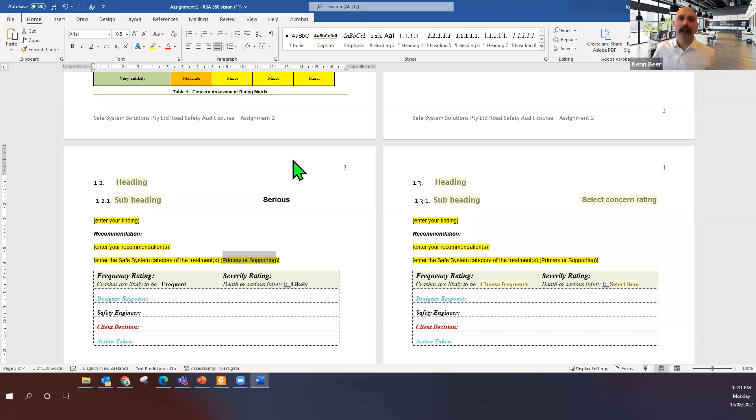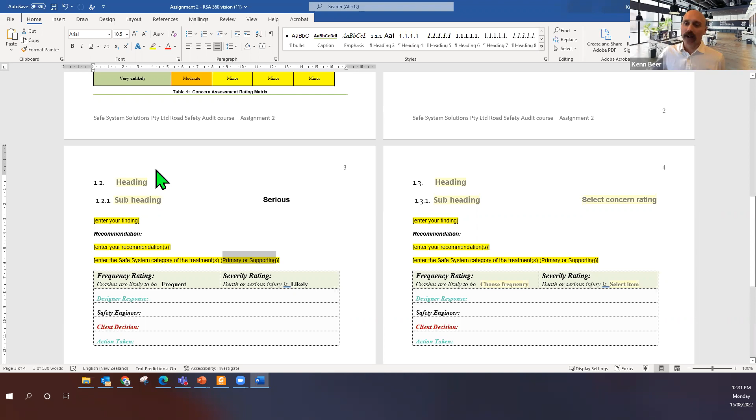You can go to the Austroads Safe System Assessment Framework if you want some lists of things to help you through that, or get in contact. Look back through the slides from earlier modules as well. Once you've done all of that, you've rounded out some nice findings, PDF the document, and then upload it back into here, add submission. Add submission, upload it.

PDF it if you can. It just makes it a lot easier on our end. If you can't work out how to do that, or you're having trouble with that, the Word document, we will be able to handle that as well. It's due at 5 p.m. on Thursday the 18th.

So we want you to have a go at this because your next assignment expands a little bit more. So we want you to practice getting all of this writing right, and then it's going to really help you for that actual audit you're going to do. Any questions about your task here?

Okay, I'm doing well.

Okay, in that case, what I'm going to do is let you now get stuck into the assignment, do your quiz, and if you are yet to finish off that research assignment, it shouldn't take you too long. You've got half an hour now. That should be enough to knock off this assignment because we don't want you doing more than 2 issues.